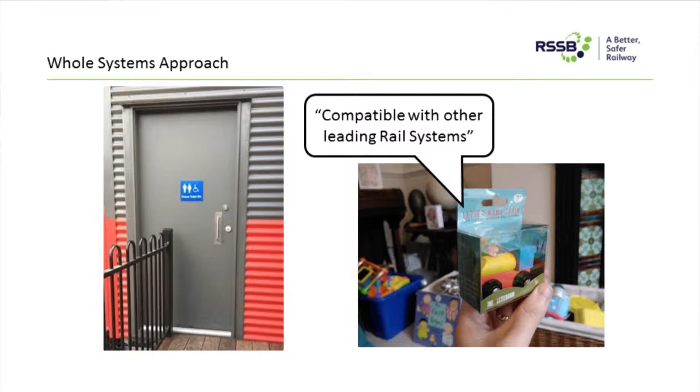So, whole systems approach. On the left, you've got an example of where two people have done their job possibly correctly, but together this doesn't work. And on the right-hand side is a funny example I found. It's a toy train I got from my son, and written on the side of this train, you wouldn't believe it, it's compatible with other leading rail systems. That's a bit over the top, but I like it.

But in reality, the whole system sort of looks like this. Today, a lot of people are going to be talking about the track system, and it's very complicated. You've got your rail, you've got your sleepers, you've got your ballast and your subsystem, you've got the environment around it. There's a lot to do. And the old joke that the track would be in great nick if they just didn't run trains over it. But somebody did bring trains to it.

They brought trains, they brought power, signals, and platforms. Things got more complicated. And then they added people. What a disaster. And not just people, they then call them customers. So we have to treat them differently. And then you get a picture when you zoom out again one more time. You get a view of all the different considerations that can happen in the railway. And this can be infinite. I mean, you have to call it a day eventually, because as more considerations come in, they have less and less of an influence, so you can define your whole system.

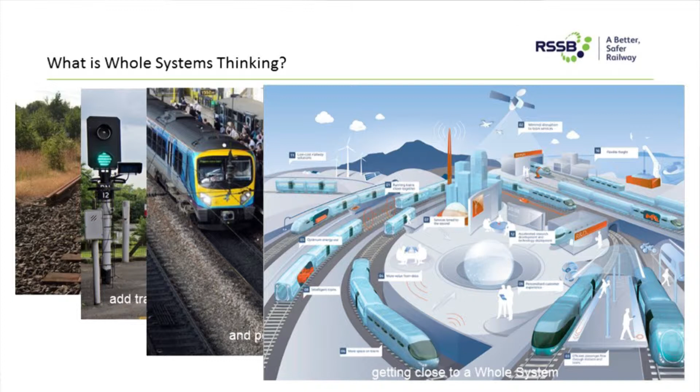And at the RSSB, we're an independent rail industry body, and we're a membership-based organisation. We are created to hold the standards for the industry independently, and also to keep an eye on safety of the industry as a whole. So we keep all the safety data and do safety analysis. We have a research programme which is funded by the DfT rather than members, which is 10 million a year. And that research programme is called a Whole Systems Research Programme.

So in this whole systems approach, things can get complicated. Even single partners can look at things in a whole system, but their whole system. But there might be one parallel to that, and they might be part of a bigger whole system. So it's just a way of keeping in mind what else is happening around you.

And on our railway, it is difficult, because you don't just have one location where you've got the considerations to make, but you've got locations in the southeast of England, you've got Scotland to consider, you've got Wales. And not just how it changes per location, but some of the assets will last 40 years plus. So you have to consider what's going to happen to them as time passes on. And it makes it really, really complicated.

And to be honest, in our jobs, everything is different in the RSSB. We won't be the greatest technical experts that you'll have in front of you today. But what we do have is that we get a variety. We get to see absolutely everything that happens in the rail industry. An average day for me, I'll be looking at things like seat comfort in the morning, and then by the afternoon, somebody will be talking to me about plastic deformation on rail, or about environmental sustainability in plus 20 years, and somebody seeking to present at a UN meeting. We cover an awful lot. I'm going to show you a few examples, and Neil will dive into a few more P-way ones.

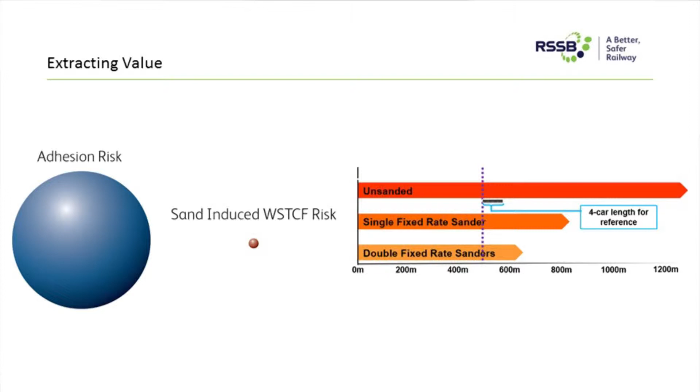What we can do at the RSSB is take a whole systems view and go, okay, so that's the sanders risk. But what happens when we look at the adhesion risk? What's the risk to people, passengers, service, when you think about not being able to stop? And that reframed the problem and went, this is serious. This is also serious. This is 170 times more serious. So let's look at what we can do about turning those sanders on.

And when they did turn on the sanders, they were able to gain about a fifth improvement in the stopping distance. But it opened up the way for even further research last year, which then got us looking at the double fixed rate sanders, and we did extensive trials, and that brought stopping distances down by half, which is really dramatic.

Another example comes from the signalling world, where we have temporary block working and emergency special working. When something like cable theft happens and the signalling system goes down, we want to continue to operate services, but without the signalling system that we rely on. So these are our fallback methods. Temporary block working had a number of steps symbolised there by the circles that you can see. And people knew emergency special working could be done with fewer steps.

But when they looked at it, for a long time they were dissuaded by the risk. Emergency special working looked more risky than temporary block working. But that's when you considered what was happening down there. When you think about what happens to those passengers that would have to take rail replacement services, the situation changed and you can do a new consideration. Similarly, emergency special working on a move-by-move basis could look safer. But when you consider the fact that if it's easier to use and it's quicker to deploy, you'll use it more often.

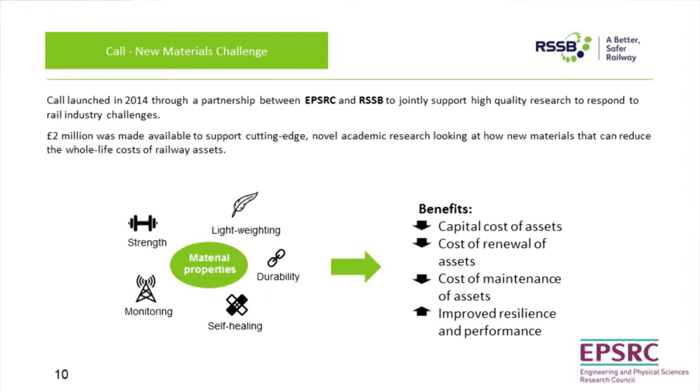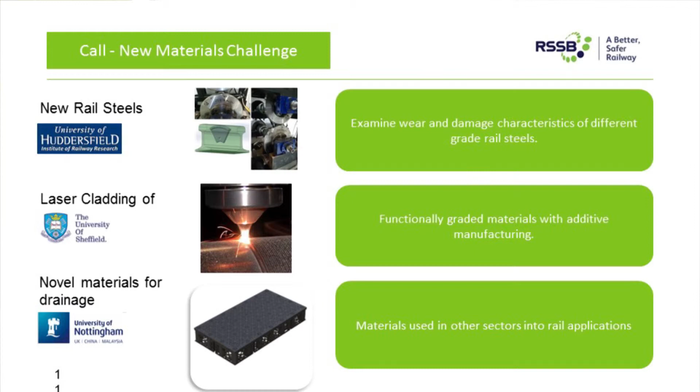And then moving on to the last one on this slide, the novel materials for drainage. What materials used in drainage outside of the rail industry could be brought across into the track drainage system, what improvements could be seen, and how we benchmark those against a conventional track drainage system, and then what the reduction in whole life costs can be. So 3 examples sitting at different points of the system, trying to understand where at those interfaces we can deliver some improvements.

So we'll move on to an example from the open procurement route. And I should say these are by no means intended to be technical representations of any of these projects. It's just really a flavour for everybody to understand what's going on. But in the open procurement route, I've highlighted the T1073 project, which is a project looking at track loading requirements for track systems. Now, this isn't about alignment design or anything like that. This is purely about track system design.

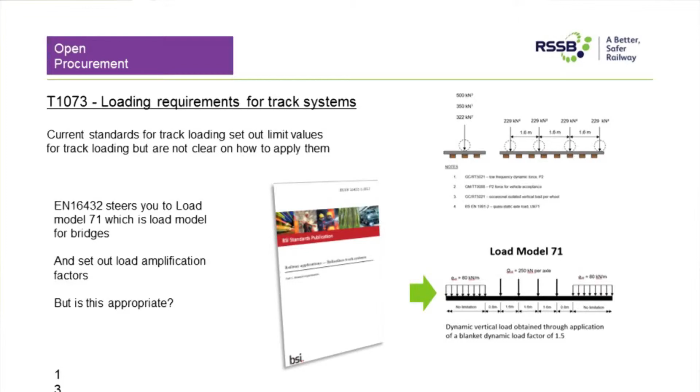And why, really? It's a pretty fundamental piece of research. Why are we doing it? Why now? Well, I guess the track system itself has probably evolved over the decades and centuries of its history, going back to the examples that Sinsin mentioned earlier. But actually, what do we design for if we want to design a track system? And as we're getting more creative with our track systems, we're pushing different alternatives of ballastless track system, and indeed hybrid systems. We're going to hear about asphalt track later on today. But what do you design for? What's the loading regime that you should design for?

If you go to railway group standards, you get to a set of limit values. Okay, that's great, but how do you apply those? It's not a lot of helpful information there. If you go to the European standard for ballastless track, you get steered towards structural Eurocodes and load model 71 and some fairly binary load amplification factors, but is that appropriate for a general track system?

So the project's been going on for a few years now. It's been tackled in two parts. The first part looking across industry at best practice for track system design, what loading regimes are applied and how. And that compiled a literature review, which was published probably 2 years ago now. And the second part that's been ongoing for the last year or so has been looking at some quite detailed models, modelling the track, the vehicle track interaction and the track soil and substructure interaction.

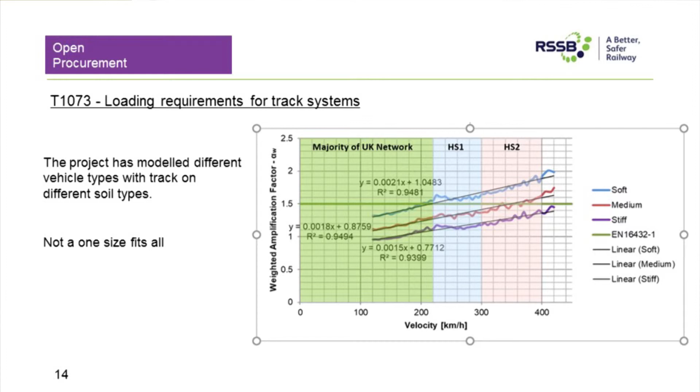And I've put this example plot up here from some of the research, and it's not intended to be taken away as an answer, but what it's trying to illustrate is that it's not necessarily one size fits all, and the load amplification factors should vary depending on the vehicle type, the track type, the soil stiffness conditions. So that project is drawing towards a conclusion, and hopefully we'll publish some outputs in the not too distant future.

So going on to strategic partnerships, a couple of projects are highlighted from the strategic partnership with the University of Huddersfield. The first one looking at the initiation and development of squats. So this project's looked at rail defects across the network and at parts of the network where there's a high propensity for the development of squat type defects. And it's doing a multi-parameter analysis for all the system parameters, both operational and technical, existing in those areas, and trying to understand the key things that correlate with the development and propagation of squats. Things like traction and braking zones, whether it's approach to signals, the support conditions, curvature, all those kind of parameters featuring in this project. And hopefully the output will steer us as industry to better understand where we need to prioritise action against these damage mechanisms.

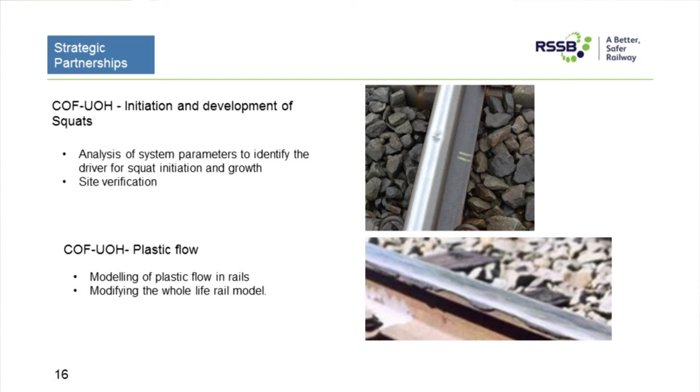And the second one, looking at plastic flow, which has done a quite detailed finite element analysis, looking at the contact conditions and trying to challenge and further develop our current models for plastic flow. Hopefully moving us to a place where we're predicting the plastic flow damage mechanism as well as we do with RCF currently.

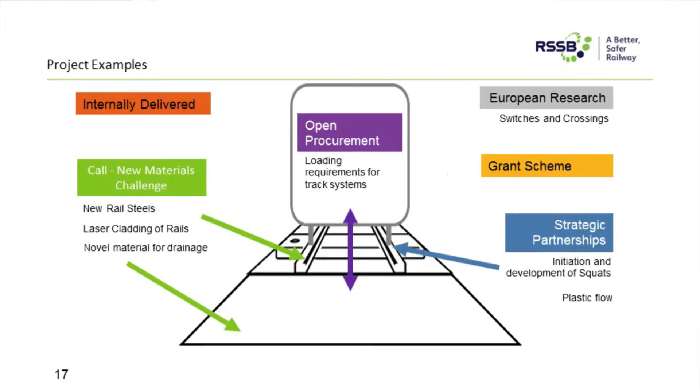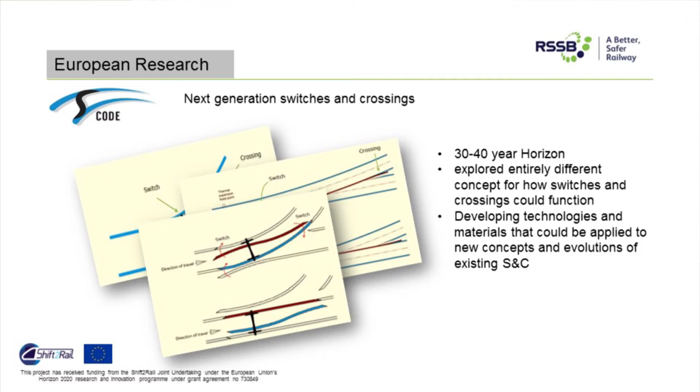And the last category I wanted to mention was European research. So I was going to pick up on the S-CODE project. So this is a project under Shift2Rail, being delivered by a consortium led by Birmingham University, but RSSB are part of that consortium. And this is looking to sort of a 30 to 40 year horizon, and its target is looking at next generation switches and crossings. So it's about understanding what we know about switches and crossings today, the way they perform, the way they're designed, and what would we do if we had a blank sheet of paper today? What, for the next 40 years, could it look like?

And that project's looked at some interesting concepts, looking at things like sort of back-to-back bistable switch, employing some of the principles that Repoint's explored, single slender switch, trying to reduce the complexity of components trackside, and even vehicle-based switching to actually try to eliminate movable components on the trackside. But it's not just about exploring interesting concepts, it's actually about looking at the technologies and materials that are needed to make those happen. And not just what we can use out of those materials and technologies to make new concepts happen, but actually what can you apply to a conventional type switch configuration that delivers some benefit.

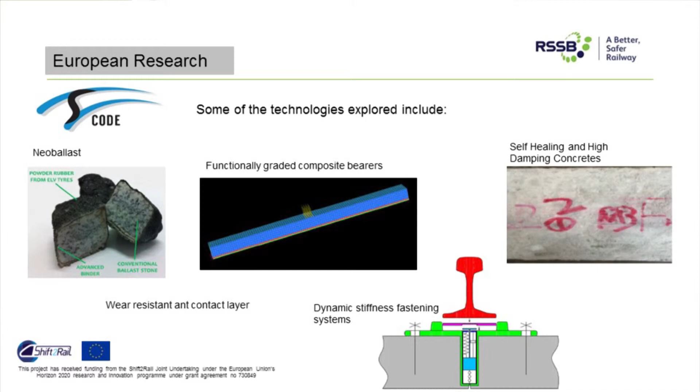So some of the things I've picked up out of the project that are probably most P-way related are things like neo-ballast. So this is exploring applying a rubber coating to conventional granite ballast, looking to improve interlocking capabilities and load transfer. Functionally graded composite bearers, trying to get some benefits out of designing a composite bearer that has better interaction with ballast. Self-healing and high damping concretes are in there.

Wear-resistant contact layer. I've already mentioned the rail cladding. This is looking at some other additive manufacturing techniques that we could apply to get better wear and damage resistance in and around critical components like switches and wheel transfer areas of crossings. And some interesting concepts looking at some dynamic stiffness fastening systems. I should say that project then feeds into In2Track2, which we're probably going to hear about in the next presentation, which is continuing under the Shift2Rail umbrella.

But where does all this stuff go? Well, some of these things I've already mentioned get picked up in further R&D programs and get taken forward to a higher technology readiness level. But other things actually, in the nature of the research that we do, which tends to be around the interfaces, actually lead to changes in best practice and the need for standards change. And it comes back to the whole system approach. Getting the right people involved in the research and development at the early stage hopefully enables us to make that transition into standards, and making it available for industry to put into practice, far more smooth and consistent. So I think Rob's got a few final comments to close.

Yeah, we'd just like to stress how beneficial it is for the industry to have the standards organisation in the same place as a research-based organisation. So often, standards are facilitated by research. So if there's a concept out there, but there's not the grounds to straight away go and do it, it can be quickly and easily transferred over and the research be done to answer the question to make the standards change. And then when we do research, which might be that blue sky thinking or research that will benefit an awful lot of parties, but not one massively, then we can do the research, come up with the answer, and it can be passed over to standards for them to make the change. And it really is a great symbiosis that exists and facilitates an awful lot of change within the industry.